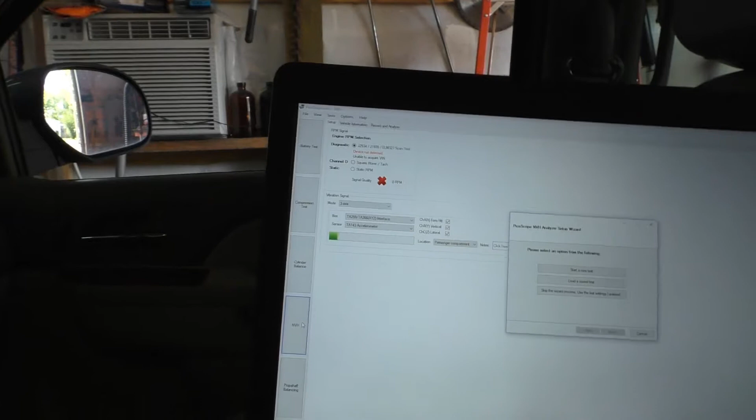By default, it's sitting on diagnostics for the RPM input. The J2534 is selected. Right now it's saying device not connected, but I know it picked it up a while ago when I tried it to make sure it's working. So that should connect.

I can't go any further with this. I don't know if the wizard might prevent it from connecting. I closed the wizard out earlier and it connected, so maybe we'll just go ahead and go through the interface.

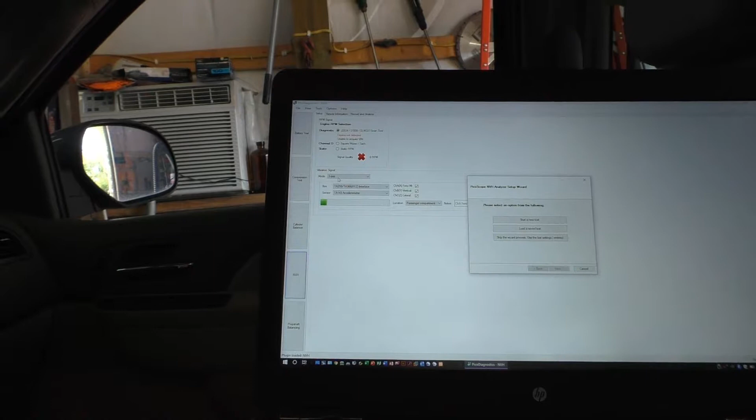The mode I've got set is for 3-axis. You have options for additional interfaces, and that's what I was talking about earlier, that eventually I might get more interfaces if this works satisfactory to me. I wouldn't be opposed to getting more to make it a complete set, but for right now all I've got is one. So it's set to 3-axis, X, Y, and Z all selected, and our location is the passenger compartment. So let's start a new test.

Diagnostic is J2534, so we're going to use that and hit next, maybe. Okay, it says Maxi Flash. Okay, it's connected, read the VIN already. So here it's asking for the number of cylinders.

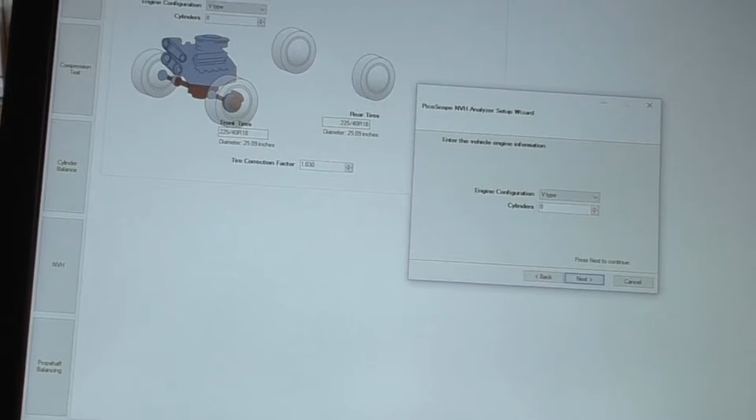I'm in a Chevrolet pickup, 8-cylinder, V-type configuration. This is a 4-wheel drive pickup. I forgot, I'm in the wizard mode. So rear differential ratio...

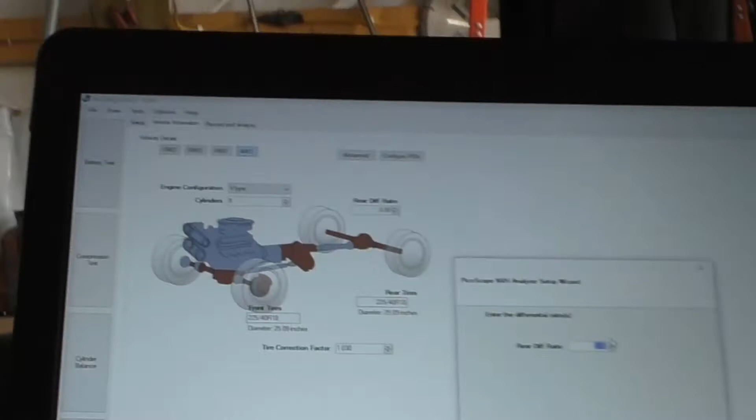3.43. You have to get that information out of your book somewhere.

Using the same value for both tires, it's asking us to put values in here. So this is a 20-inch, and it's a 55 ratio. And these tires here are 275, 55/20.

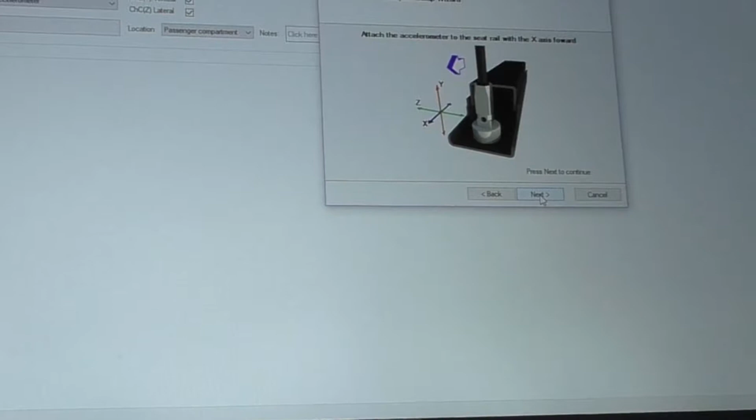We're going to use a 3-channel interface, the TA143 accelerometer. Connect accelerometer to channel A, B, and C of the PicoScope. That's already done, this is already done. And here we have the option to finish this.

I want to switch over now to the GoPro because this is too hard to do with this here. I'll go to the GoPro and start recording when we're getting up to speed. I'm going to have to go to the highway. I don't know how good the recording is going to be, so bear with me.

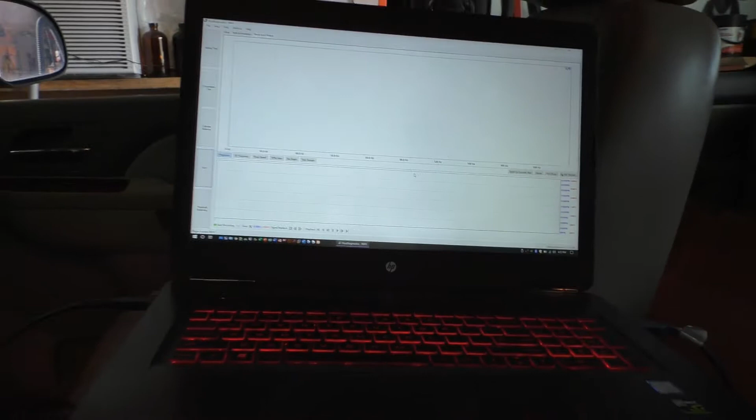We're going to go through there when we get back. Yep, wind noise you're going to have to just tolerate. Well, it's actually not the wind, it's the blower motor. We went from 70 degrees to almost 90 degrees again, so it's a bit hot outside. Well, not hot yet, but it's sure getting warm.

Right now I'm on the way to the interstate, and I know that... I'm gonna back up on this. I know it's going to start shaking right around 70, 75, 78 miles an hour, somewhere around that area. It's the worst right now. I don't have any shaking, can't feel anything, but it will shake as soon as I hit the highway. So bear with me, I'll be right there.

I'll have to hit the record button. I think there is a limit to how much this thing records. Well, I think I know there is, don't remember what it was, but anyway, I don't want to use up all that time, so I have enough time to make a trip down and back up and be able to record all of it.

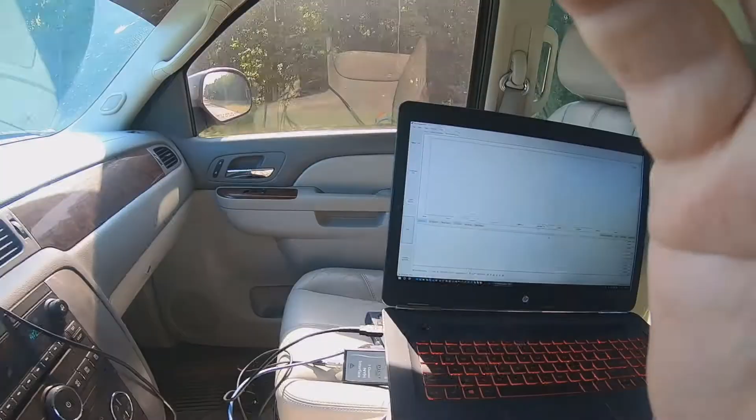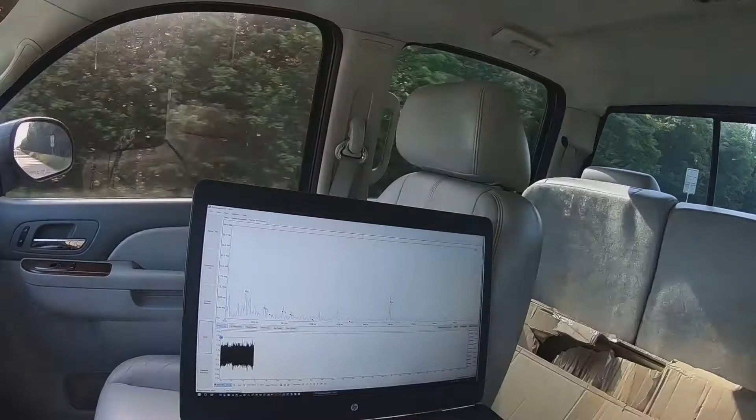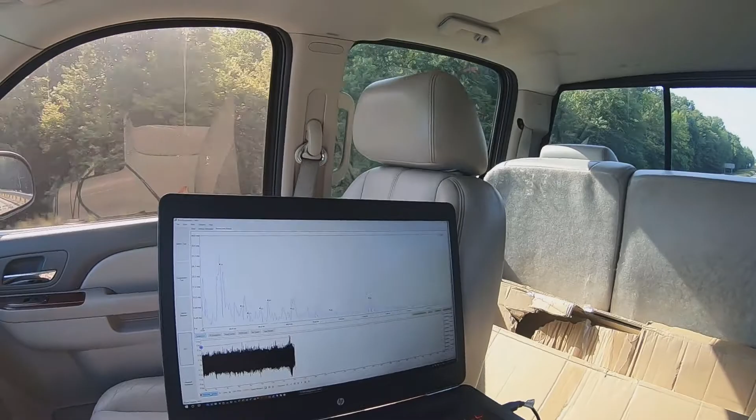So I'm about to hit the interstate here. I'm fixing to start recording. I'm going to try, I hope this works out with the GoPro, and I'm going to reach over here and hit the start recording. Of course, unfortunately, that is also a GoPro command, and I keep turning the GoPro off when I say the words about the, you know what. So anyway, there you go, you have it.

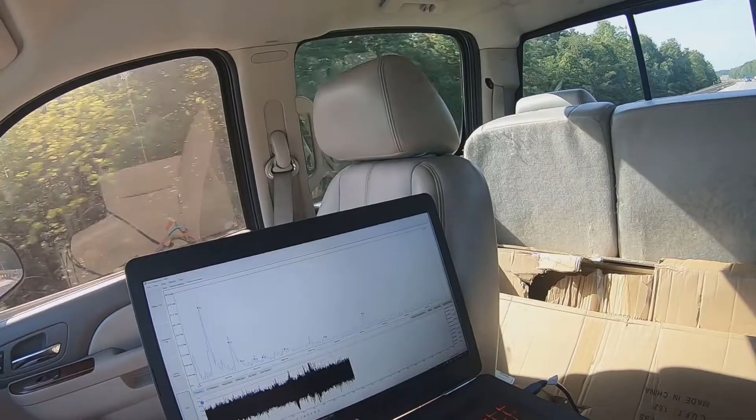I'm at 75 miles an hour, and this is where the shaking is the worst. Undoubtedly, it is shaking like crazy now.

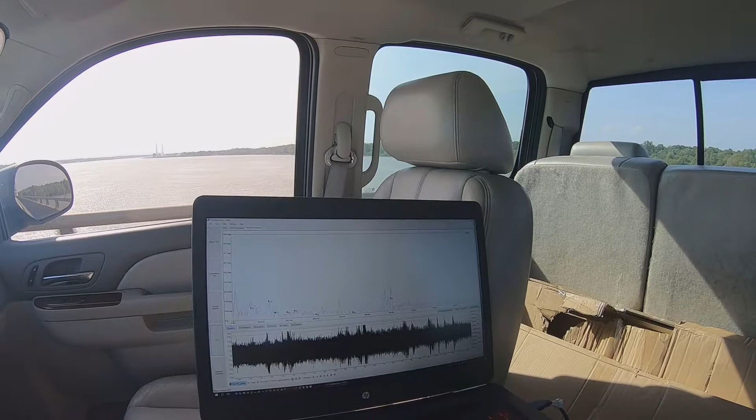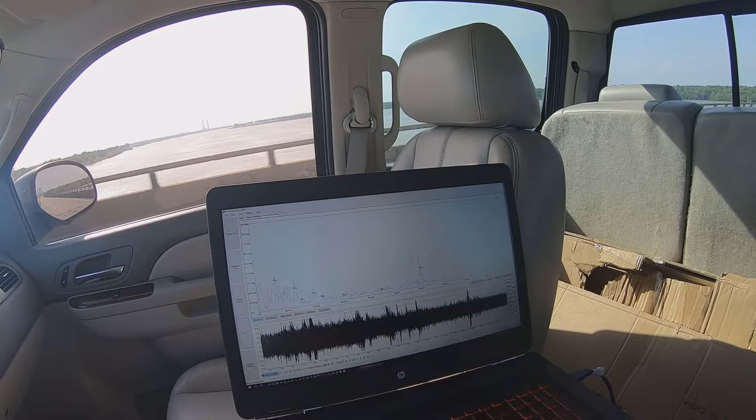Get on the other side of the road here. The road is pretty bad in these parts, so it's not helping matters none. So reduce the speed down to about, right now I'm doing about 72 or so, and it's almost gone. I can feel some, but not a lot. Okay, going back up to 75.

So I'm going to cut the video right here, and I want to tell you something about it. Mistakes were made, some of them I made, some of them just a problem. I'm not going to spoil it.

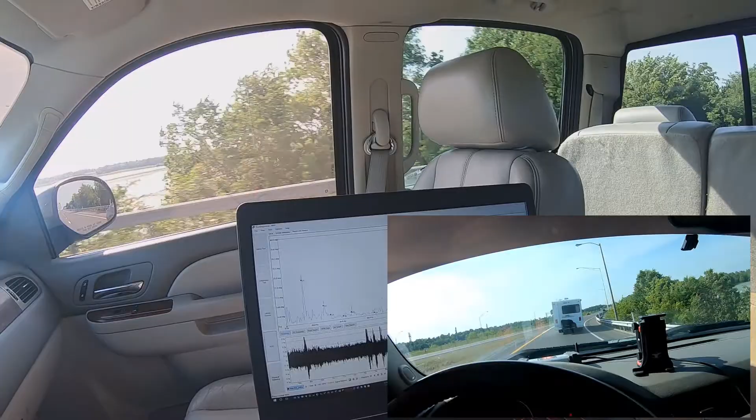I made several more trips down the interstate. That's about the only spot right there that I can really pick up speed and get the vibration at its worst. But anyway, if you want to get to the point where I'll explain what actually happened and what I've learned, just stay tuned for the video and watch the whole thing. It's not that terribly long, but anyway, I'm going to cut the video right here, and we'll pick back up with the explanation of what happened.

So, ladies and gentlemen, I feel like I need to share this with you. I've had quite a bit of aggravation with this NVH setup.

I got close to the point where I wanted to just send it back and forget about it, but we've got some things ironed out, and I am going to go through here with you guys. I wanted to share this in case somebody ever runs into that same problem, so you don't get upset for no reason.

So first off, when you're recording, when you're going down the road recording your data, the time here in the window that you see is all you're going to get. You can't make a test drive, record the whole thing, stop the recording, and think you're going to be scrolling backwards and forward. It's not happening. What you see in the window is what you get.

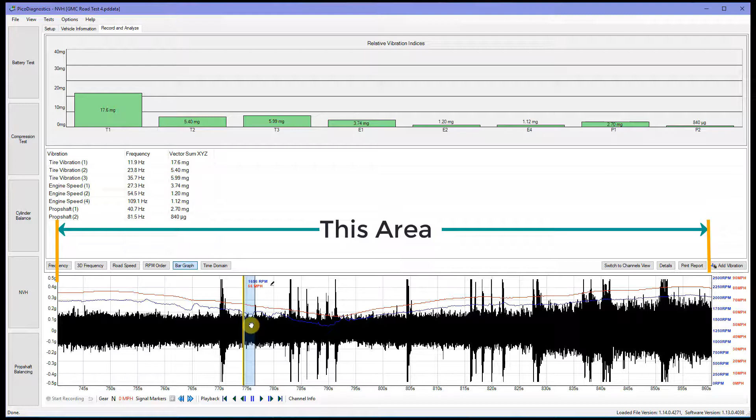There is, however, a problem with that. This screen here, and this information I got from Pico support themselves, is going to be compressed into your 8 minutes. So everything is so compressed that I don't believe you're going to get the details you need to find a problem, depending on what you're doing, I'm sure. They confirmed that, sort of, kind of, it was vague, but anyway, just food for thought, I figured I'd share that.

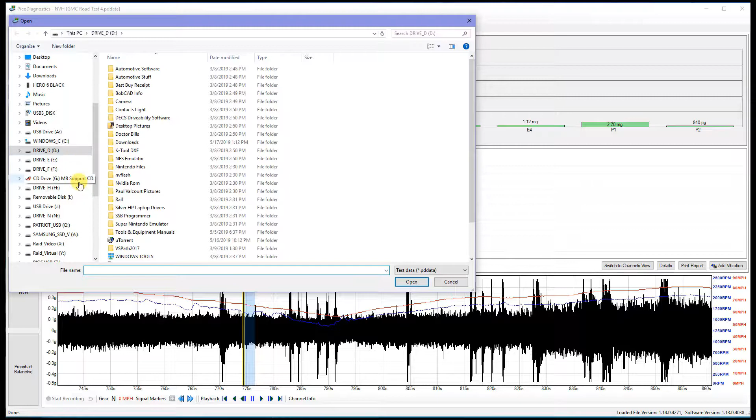Now, one of the worst problems that I've had with the software, and for that I'm going to load another file if I can find it. Okay, so I'm loading this file right here, okay?

I'm trying to think, it's not that I don't know what I want to do, I don't know which direction I want to head first. No, I'm not going to do this, I'm gonna talk about this here first. So first, let's talk about this.

So I was making all these test drives, trying to get data, and really none of it was showing up right, it didn't make any sense. The whole thing didn't make any sense. Setup was correct, I verified my setup.

And this is over here in the vehicle information. I verified and made sure these values are correct, which they are. My truck is a four-wheel drive, 8-cylinder V8, 3.42 differential ratio, and 275/55/20 tires. Tire correction factor should be default, which should be 1.03. I do not know, it's really vague in the description what that tire correction factor actually does, so I leave it at 1.03, the default.

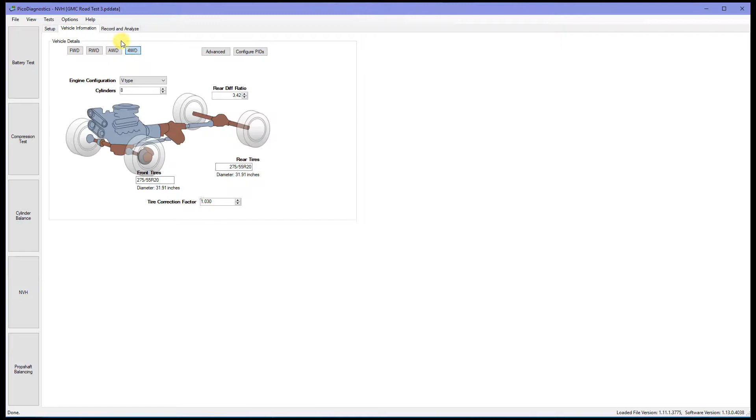And so I was looking at the information showing on screen, and by God it did not make sense at all to me. I'm like, okay, at this point I'm getting upset because there's no telling how many test drives I've done, going down the interstate and coming back, just to see the vibration, because the vibration I've got is at 75 to 85, I guess, really to be honest, that's when it's worse. So I wanted to see this on the screen, but I could not see it.

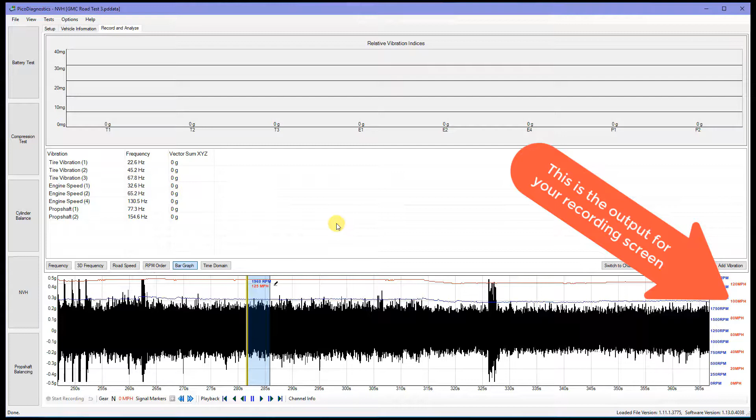So this was actually yesterday that I did this, and it finally occurred to me to have a closer look. So down here, where you have your start recording, your gear, your miles per hour, and you've got your play buttons, fast forward, whatever, and then here off to the right, we have the RPM and the miles per hour. Now it did not dawn on me at all yesterday. I noticed the label, but I kind of thought, well, I don't know what's going on right there. I just didn't know, because I've never messed with this.

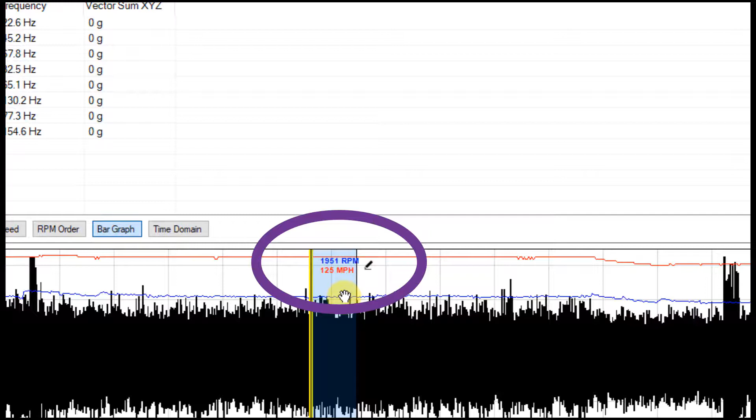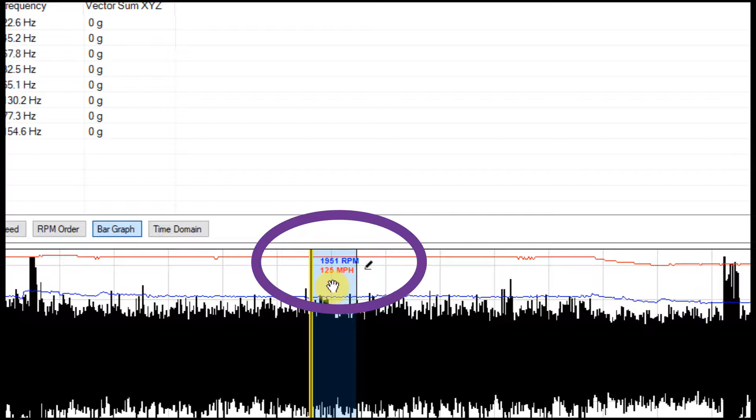So guys, take a look over here, I don't know if you can see it in the video, well yeah, you can, when I edit it I will zoom into that, so bear with me, I'm going to zoom in over here in this spot. But this is actually telling us I'm running at 1951 RPM, but look at the miles per hour, 125 miles per hour, I'm sorry, impossible, not in my truck. At 1900 engine RPM, you're not going to run 125 miles an hour, not on a good day.

So this I've noticed, but what I did not know is down here, when I connect it to my M327, this here would start out at MPH, and all of a sudden it would switch to kilometers per hour. So the output is actually saying miles per hour, but it actually used kilometers per hour.

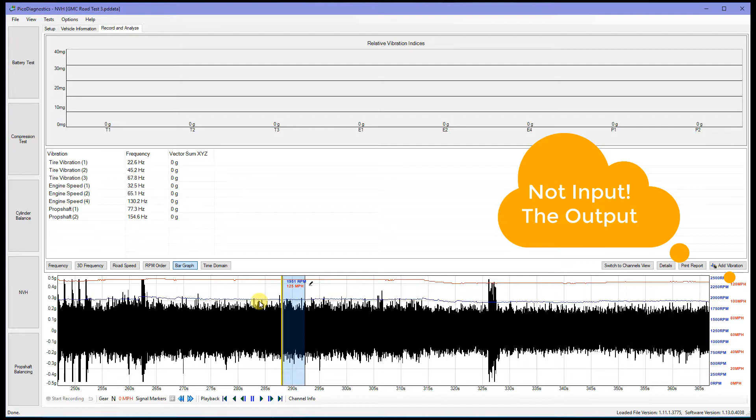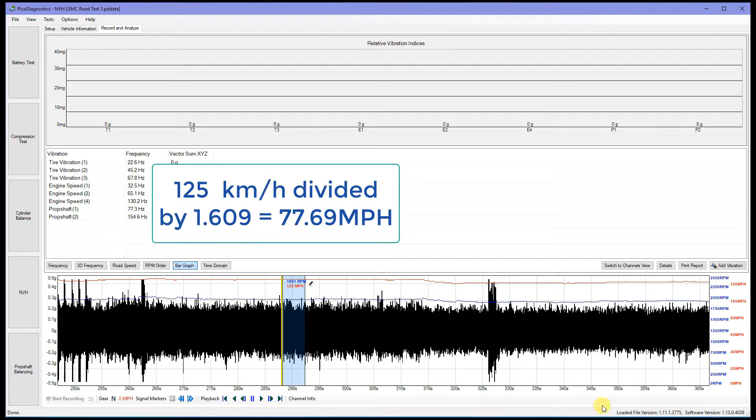So really what I was doing, I should have been doing 125 kilometers per hour here. Should have been 77 miles an hour, 75, somewhere in that neighborhood. So this is the reason the software cannot show us what is actually going on. It has no way of calculating, because it was thinking I was running at 125 miles an hour, which would skew the frequency so much that it would be impossible to make any kind of accurate calculation.

So moving forward with that, I finally figured that out. I called tech support, called Pico tech support, and was emailing him as well. Also called our friends over at AES Wave and talked to Scott over there. And we finally came up with the idea of why not go ahead and uninstall and reinstall.

So I did that, because we were sitting out in the truck earlier. I had him on the phone, and right in front of my eyes, after it was already connected, it changed from MPH to KMH. I literally caught it with my eyes, I seen it myself. It just switched for whatever reason. It made the input go to kilometers instead of miles.

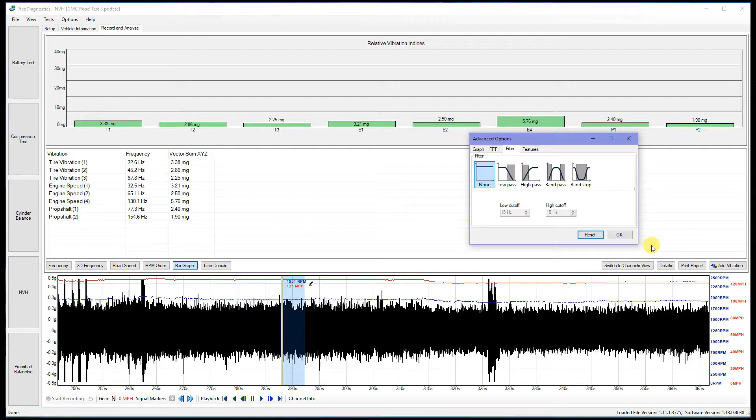So still right now, when I close the program and open the program, by default the Pico diagnostic will enable a low pass filter. We don't want that. I figured I'd share this with you guys. Not a big deal, I know it's doing it, I can turn it off in a matter of a second. Not a big deal, but I just wanted everybody to be aware that this is happening.

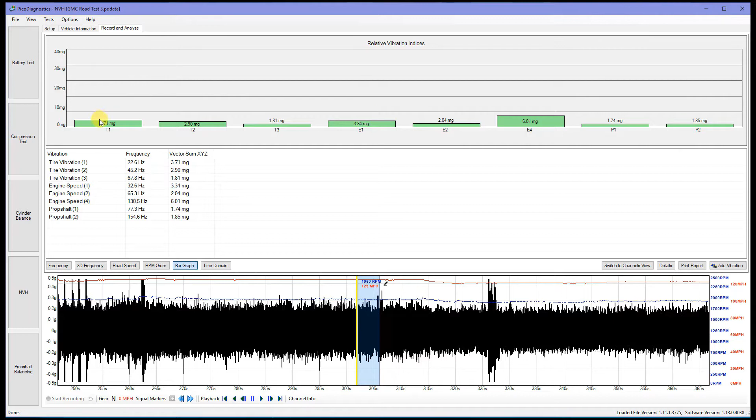So in this file right here, this thing that I saved, you can see miles per hour, it says 125. So now I'm going to load up the other one. You see the graphs over here, what they're showing. Let's go ahead and load the other file, the most recent file that I have.

So now let's look at the same thing. Okay, we can already see the difference, now it's actually showing what's actually happening. When we scroll through here, it's showing 1700 RPM, 67 miles an hour. It's showing 1775, 70 mile an hour. Or you make a broader spectrum by selecting this blue area here - this is the spectrum, this is what it's showing up here: 72 miles an hour at 1845 RPM. Now that part is working, and it's actually showing us what is going on here.